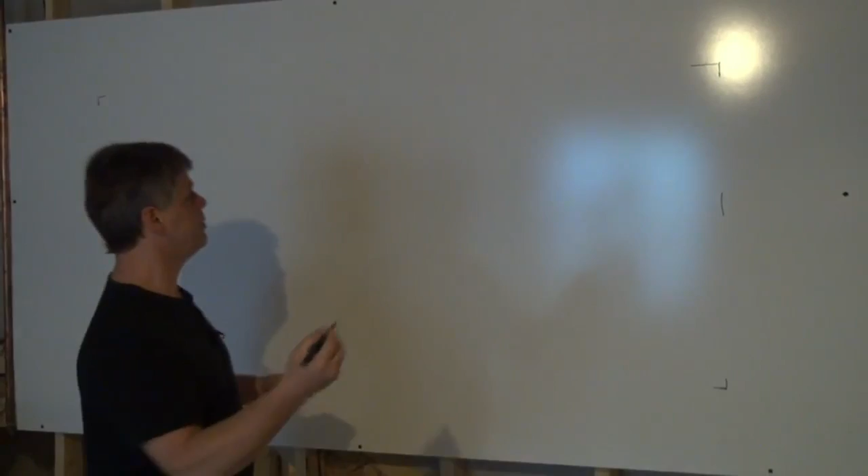This is where it all begins. And what we're going to be talking about today is the design. Without a design for your basement, you're kind of like a ship in the ocean without a rudder. This is what I find most homeowners that want to do their own basement are like. They're just nailing up walls, nailing 2x4s together in an attempt to finish off a portion of the basement. But they don't have any real clear-cut plan of attack. And the plan of attack in any construction project, be it a basement, a kitchen, a bathroom, or a backyard shed, you need a plan.

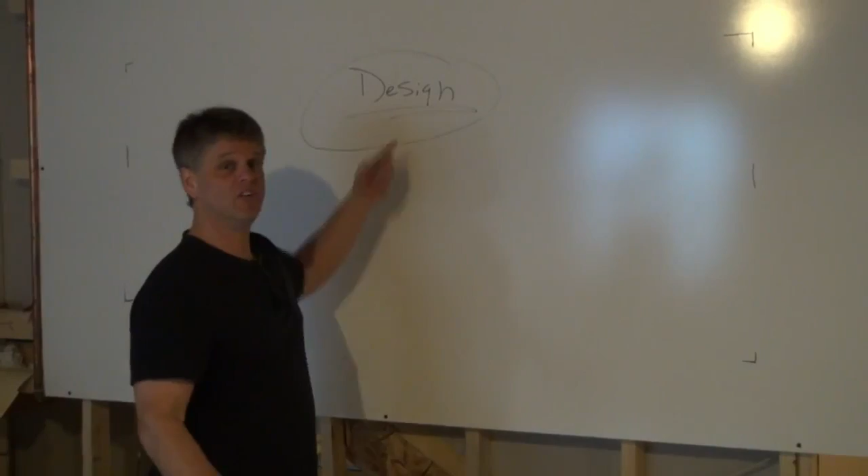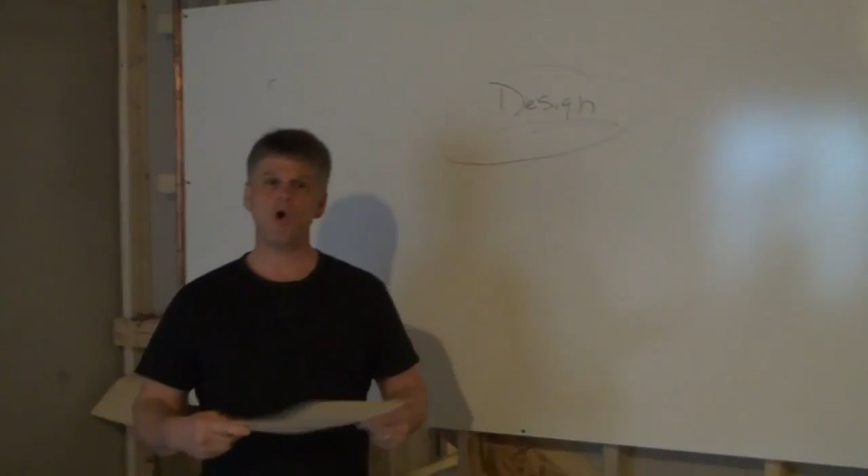You need a floor plan, and you can't arrive at a floor plan without a design. So what we're going to do today is I'm going to be using this big whiteboard in place of what I normally use in the field, a folder. What I'm going to do is walk you through this basement that I'm standing in here this morning, which is an actual client. My client has allowed me to film this job to make some of these videos for you. So I'm going to design this basement.

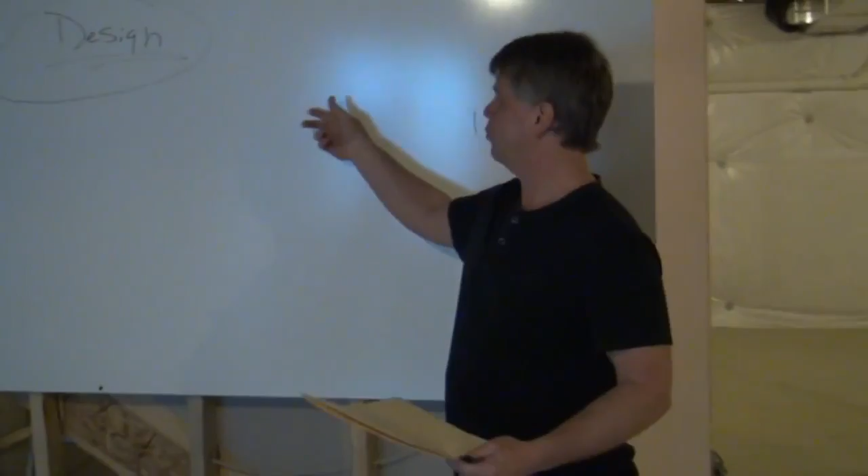Now if I was coming down for the first day, I'd have one of these folders. This is actually what I'll be designing on when I come to see a client. But for educational sake, I'm going to do it on the big whiteboard, what I normally would do on the folder, so that you can see what I'm doing.

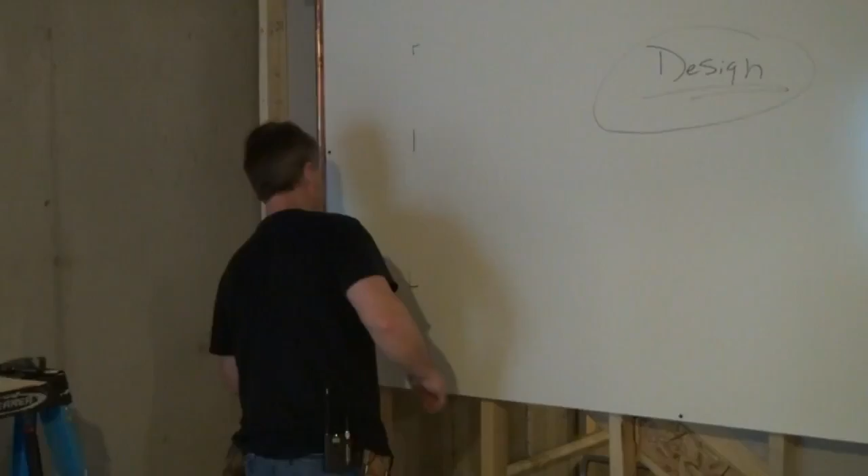The first phase of any design is we have to draw the basement. As you can see, we're standing in an empty basement. As we know from an earlier video, this basement is a perfect rectangle. We've got 4 walls down here, we're in a rectangle. There's no outcroppings in this foundation, this isn't a real fancy foundation. Your basement might have some different shapes to the foundation, it might not be a perfect square or a perfect rectangle.

But this one is, so we're going to be drawing a perfect rectangle. I'm going to do that up here on my board, because this is where it all starts. This is the very beginning of your basement project. It starts on paper. So we're going to draw ourselves a rectangle, and I'm just doing this freehand here, so don't expect perfection. I'm no artist. There's the rectangle, this is the basement that we're in right now.

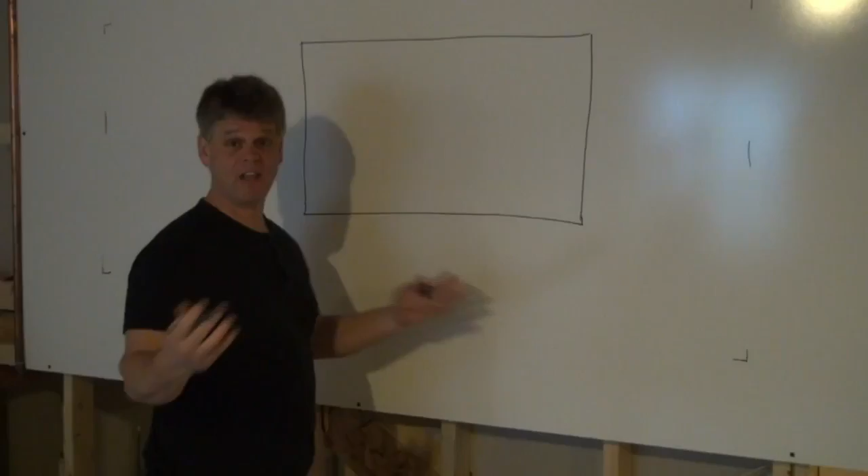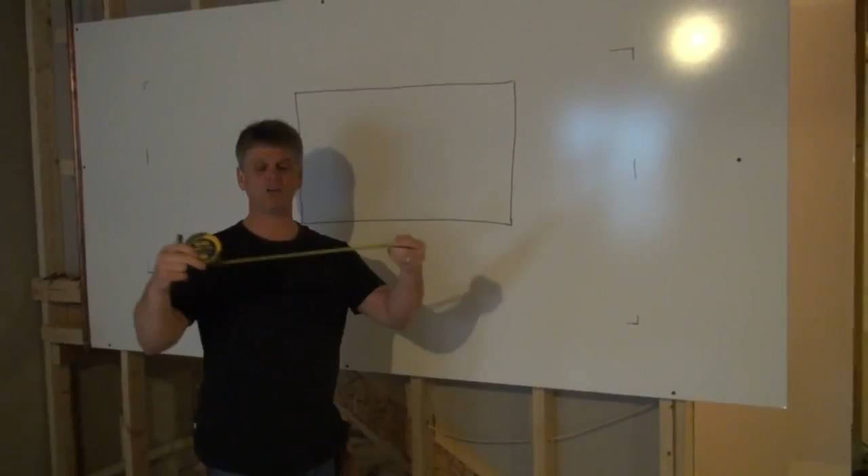Now, what I'm going to do first, before I put anything in the picture here - stairs and furnaces and all that other stuff that's down here, which will eventually be in here - the very first thing we're going to do is go around with our tape measure. I've got a Stanley 30-foot tape here. I recommend you get a contractor grade tape measure, you're going to be using this throughout your basement project anyhow. So get yourself a good tape. This is a 30, but don't get anything less than a 25.

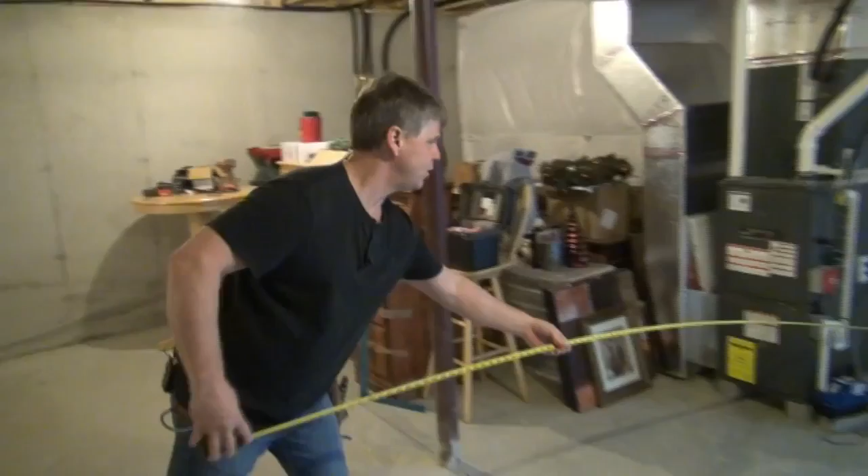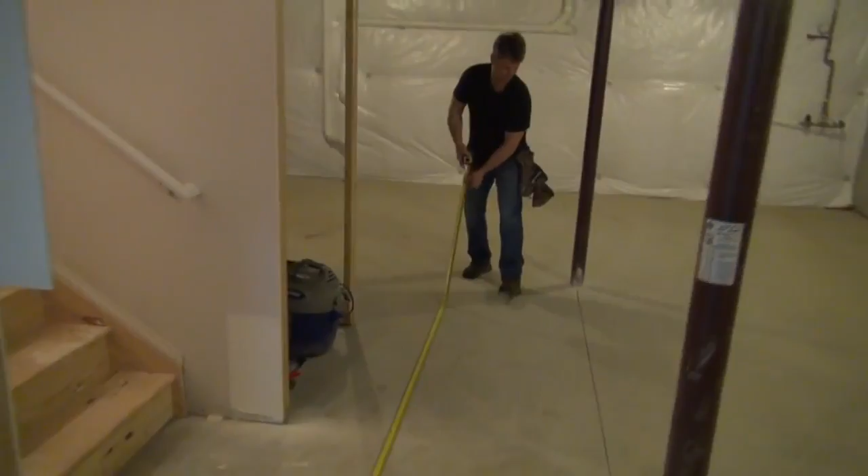What I'm going to do is real quick, run around and measure the 4 walls that we just drew on the big whiteboard there. So I'm going to get the width of the basement first, and you can find the width anywhere - it doesn't have to be along the wall, just as long as you're going across the full width of the basement. So I'm going to go right down the middle of the basement here. And I know this basement is longer than 30 foot, so what I'm going to do is just pull my tape out to the 30-foot mark, and here's where it ends.

I'm going to put a marker down here. You can use a pencil or whatever, just to lay it on the floor so that you know where your 30-foot mark is, or if you have a 25-foot tape, where your 25-foot mark is. So I know that that's 30 feet there.

And I'll go from that mark the rest of the way to get the rest of the measurement. And there I got another 9 feet. So 30 plus 9 is 39 feet.

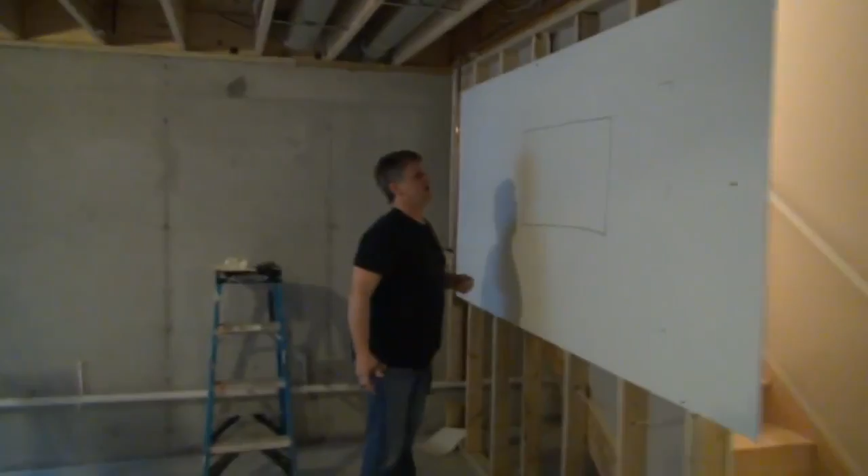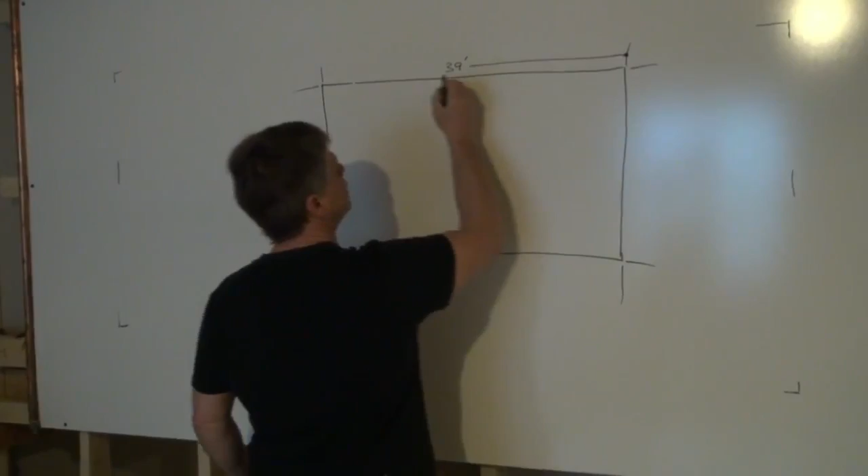Let's put that on our drawing. Now, to make it easy so I don't crowd the inside of my basement where I'm going to be putting all my stuff, I'm going to put these measurements on the outside. You can see I'm making these hash marks around the outside off of each corner. I'm going to put that 39 foot right here, and then put a line going over. You can make little arrows or circles, it doesn't matter, but this is the way you begin your floor plan, because that's what this is going to turn into.

This is going to turn into the working drawing, the working floor plan for this basement that I'm doing for my client. So if one side's 39, the other side's going to be 39 because it's a perfect rectangle. Now we got to get these two sides of the rectangle.

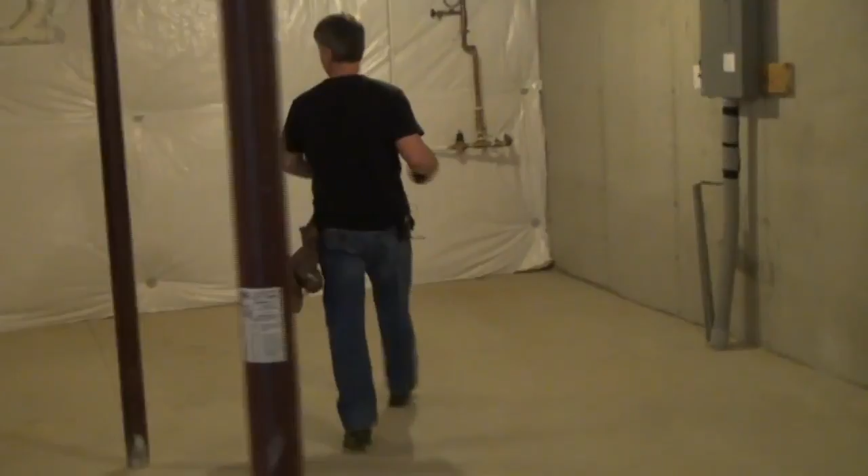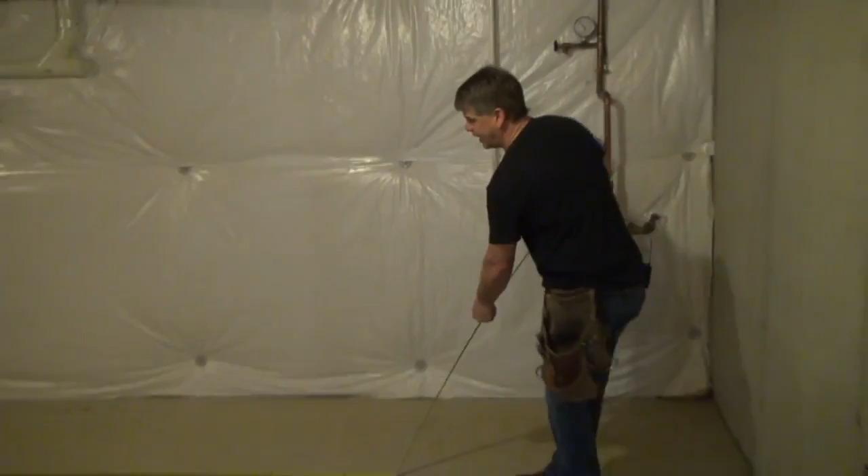So I'm going to go back over here to this end of the basement. I can measure either end. I'm going to come down here because it's a little easier to film, and I'm just going to measure right across here. You can see I'm doing this all by myself, I don't need a helper here. I'm just laying my tape on the floor. And I got 23 feet.

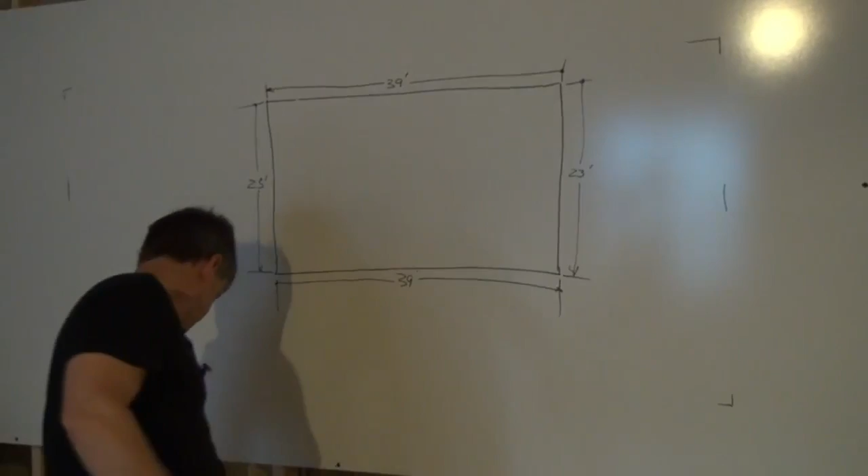We'll put those on the sides, 23 feet. And we'll make those arrows here, whatever you want to do. You can make a little circle up here at the end, or come down and put an arrowhead on there. 23 feet. Okay, there's the dimensions of our basement. We know it's a 39 by 23 basement.

Now the next thing that I'm going to put in here is going to be my stairs, because the stairs are kind of the biggest obstacle that you have to work around. If you come over here and look back this way, you can see that I'm standing in front of the staircase. We've got the upper steps coming down, you can see them up there coming down, and then you can see a landing up here and then another set.

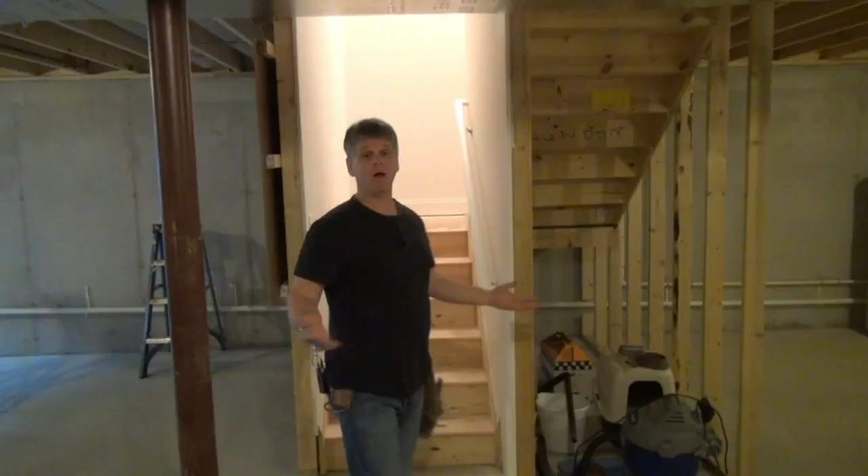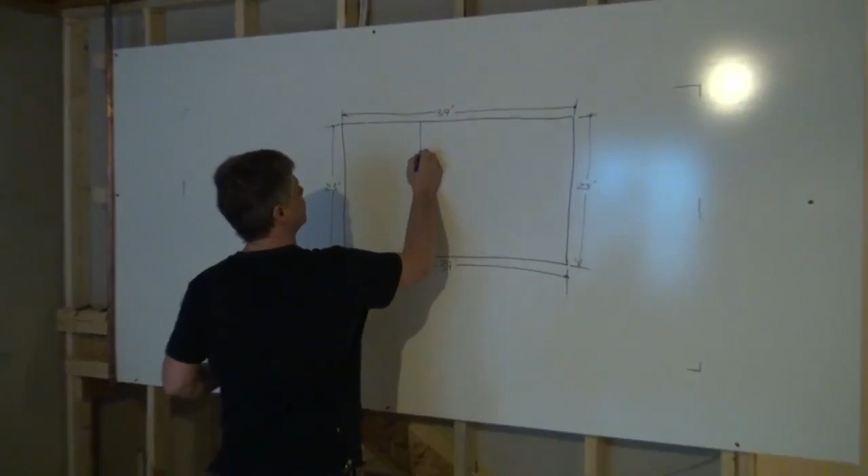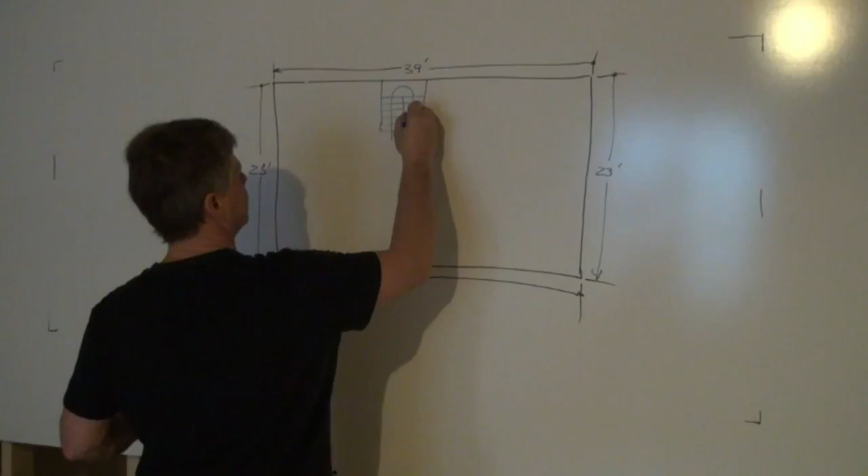So this set of steps comes down to a landing, turns, and comes down. I've got to get this drawn on my plan so I know what I have to work around. So we're going to draw that set of steps, and they're going to look like this. Got a landing over here, and then we've got a set of steps coming down to the landing and then turning and coming back down like this. So I'm going to draw an arrow going around and up. We go up the stairs to the landing, around, and then up to the first floor of the house. So there's my steps.

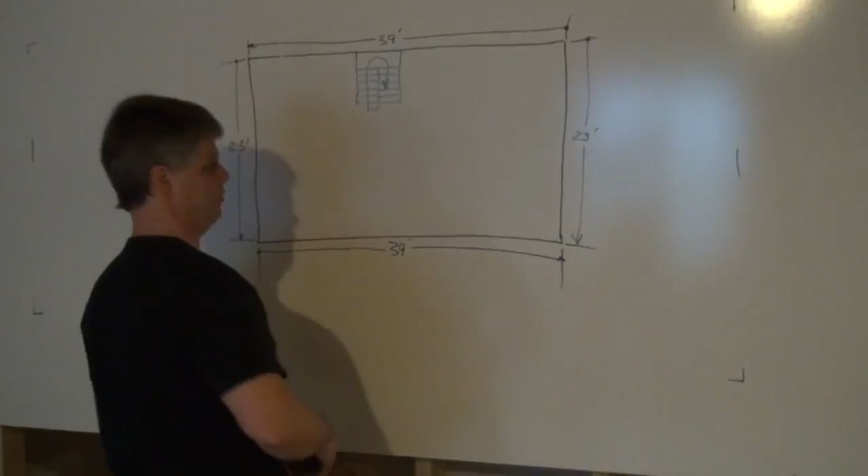Now what I want to do is get the measurements of these steps. How big is my staircase? I need a width and a length of these stairs. So I'm going to measure that right here because I'm standing in front of the stairway wall. I've got 8 foot that way, and I've got 7 foot this way.

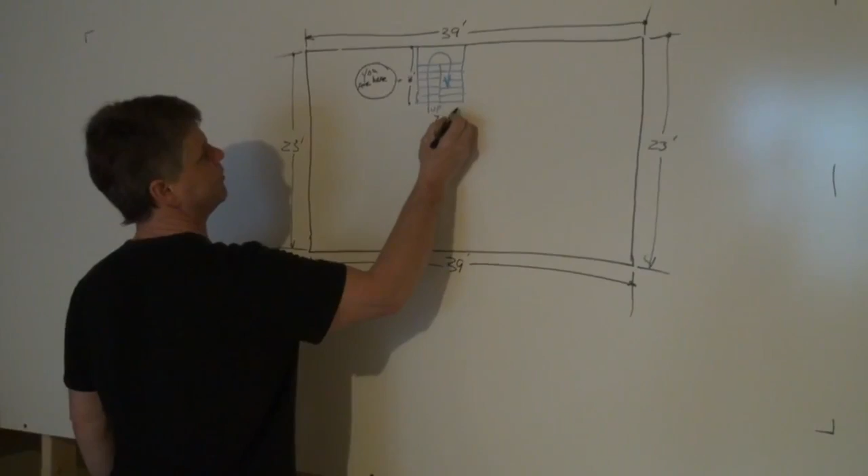I'm going to go ahead and put that on there. All right, we're standing right here. We'll put one of those things you see at the airport, you are here. We're looking this way. So we just measured that there, the length of it is 8 foot, so we're going to put an 8 there. And coming this way, it was 7 foot. Got little lines there, 7 foot this way. There's our steps.

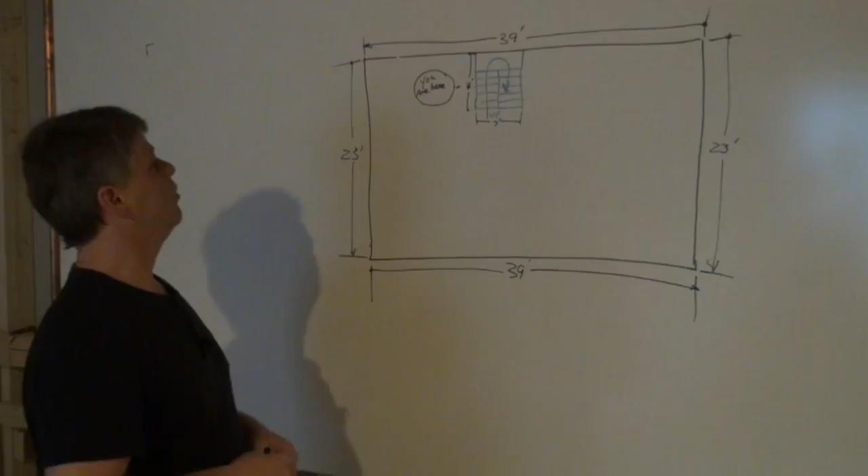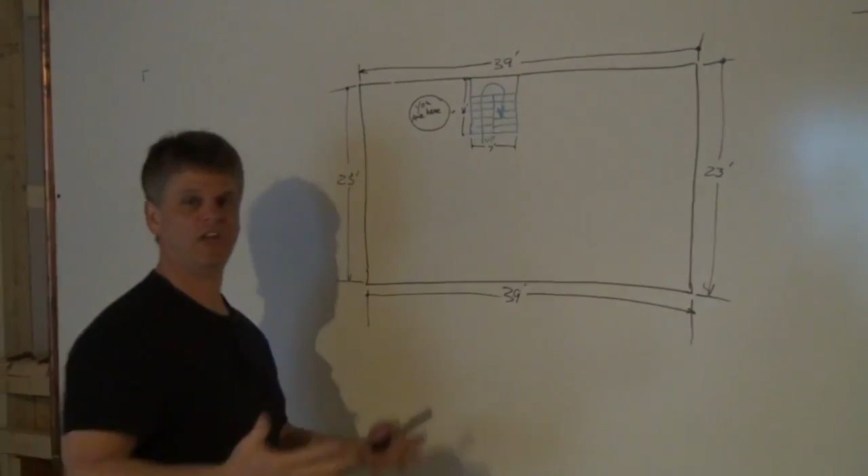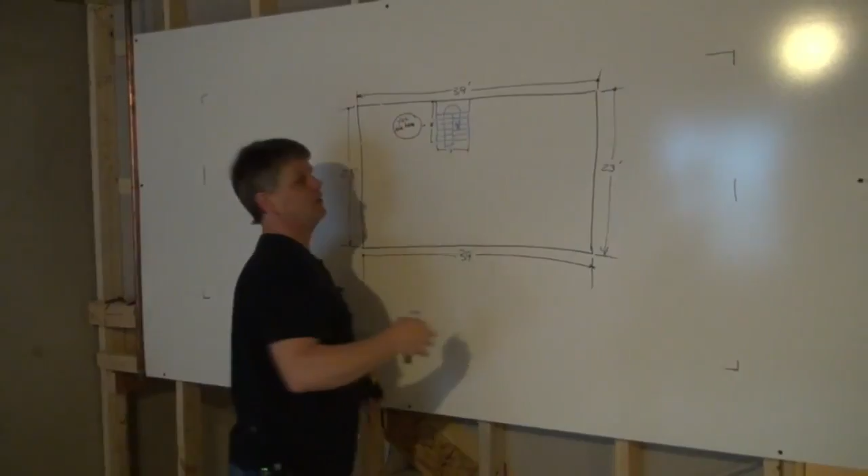Now, just having the size of the steps in relation to the basement is not enough. We have to get the location of those stairs in relation to all the other walls. Where is it actually sitting in the basement? So we'll get some measurements to find out. I get that by pulling my tape off of the walls in the basement, and it's really up to me how I want to do it. I can pull off this front wall back to the stairs, or off either of these side walls back over to the side of the steps to get 2 measurements. You need 2 points. So we're going to get this one first here, right where we're standing, off that outside wall, over to my steps. I've got 17 feet 6 inches.

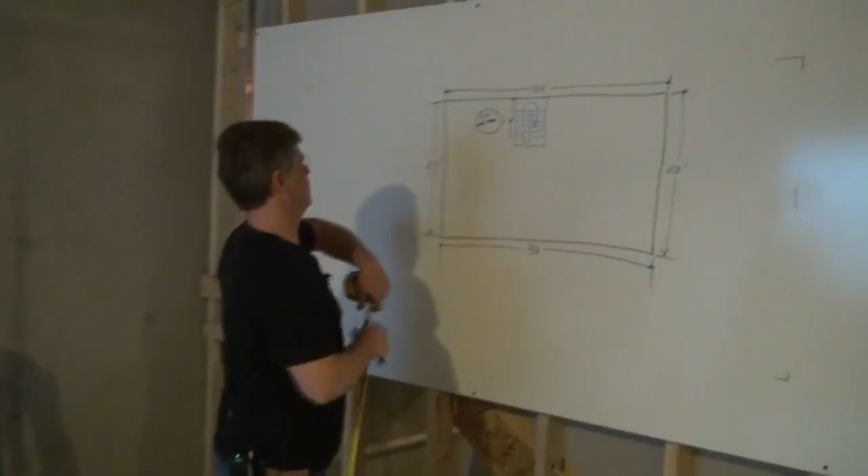All right, so we're going to put that in there. 17 foot 6 inches. And we'll do our little measuring lines there.

All right, why don't we go from the side wall over there back to the front of the steps and get the other measurement. Come off that wall there and right back over to the bottom of our steps, and that's 15 feet. All right, we'll put that on there. 15 feet.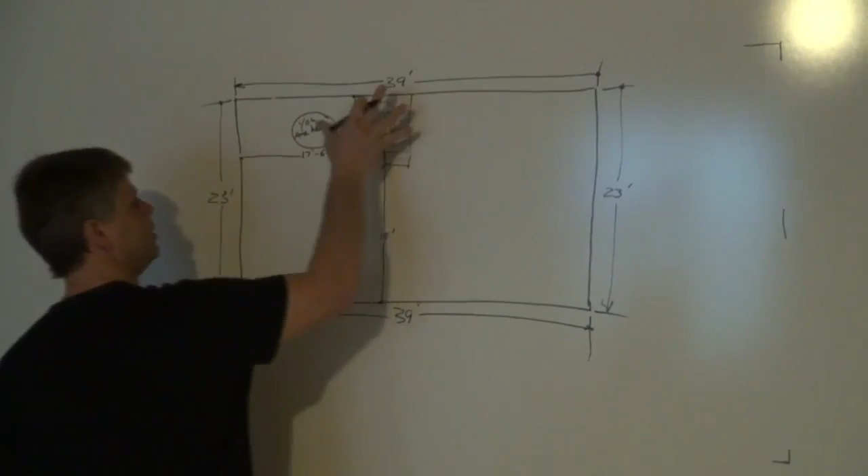All right, now we know the size of our steps and exactly where they're located. Okay, now we're ready for some more obstacles.

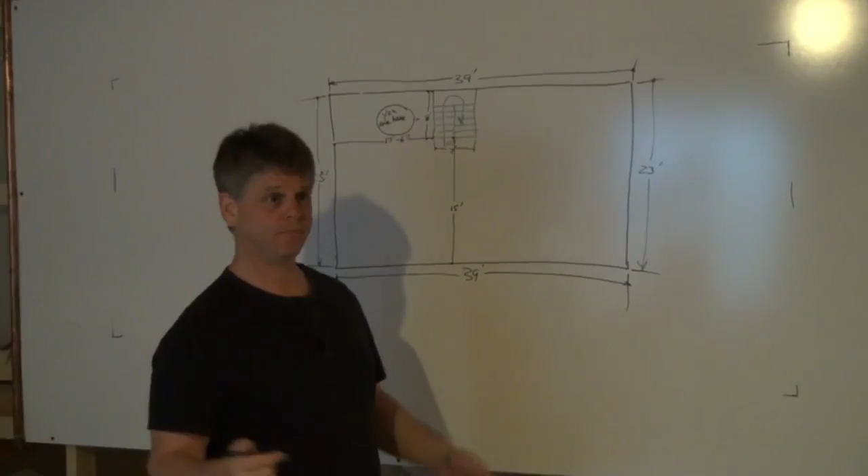The next ones that I put in are the support columns. Okay, and you can see we got here 3 of them. 1, 2, and 3.

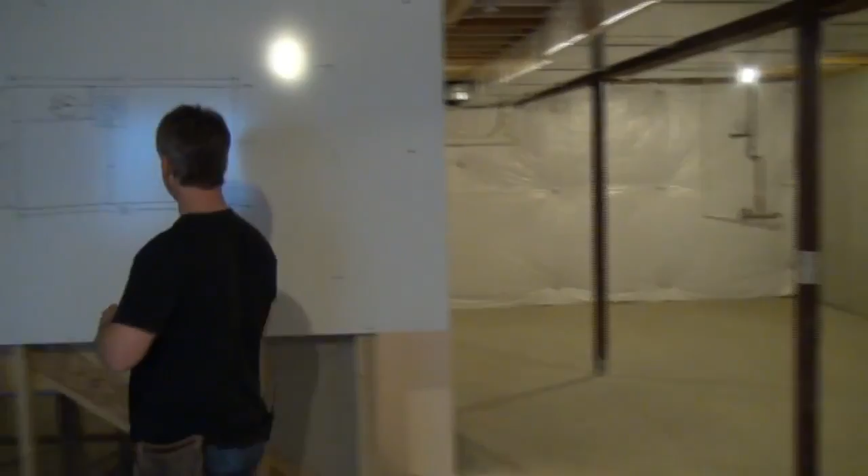Okay, what we have to do is find the centers of all 3 of these columns, because these are definitely going to play out in our design. Whether we're building walls around these, half walls between them, whatever it is that we're going to do, we're going to have to design around these. These are going to influence our design, so we have to know exactly where they are. Not kind of sort of where they are, we need to know exactly where they are.

So I'm going to go ahead and draw them in here. I know I have one here, I've got one here, and I've got one more about halfway out in this bigger area over here. All right, so I'm just drawing 3 circles. And then I'm going to put some crosshairs on those, right down through them.

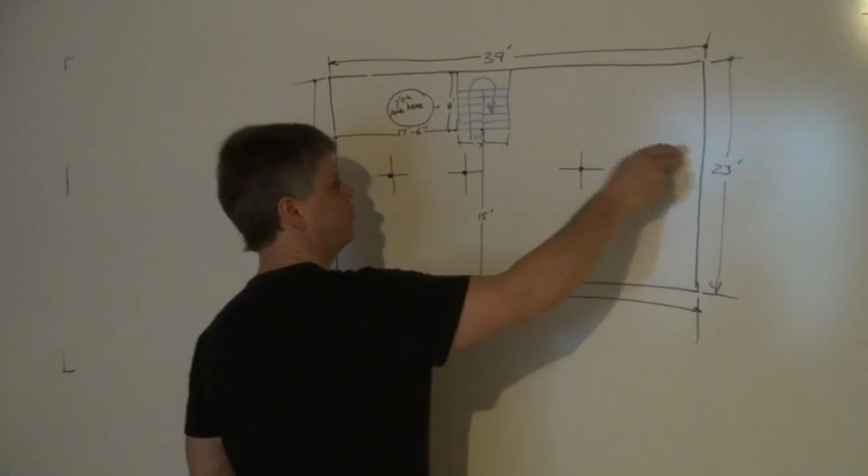All right, and what we're going to do now is find out where these poles, these support columns, are in relation to our exterior walls. And we need 2 points again, I need an over and a back. So I'm going to come off the end wall down here and find the overs for all of them, and then the back on them.

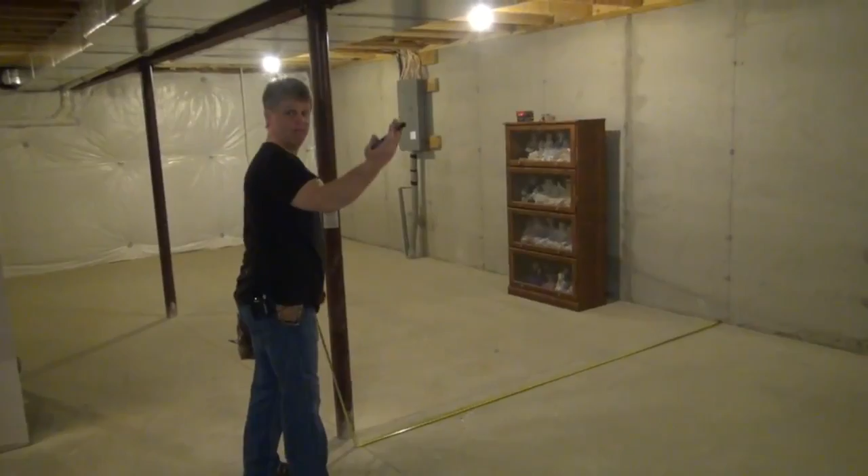Okay, so let's do that first. Let's do the back over to them here. Off that back wall over to my center column, and I can take any 3 of these because they're all going to have the same over, since they're all in line with the beam above. All 3 of these columns are holding up the same beam up here.

So if I get one over measurement, I got all 3 of them. It looks like 9 foot 9 inches. So I'm going to put that on our drawing here. This is the one we just measured, 9 foot 9 inches. And I know that the other ones are going to be 9 foot 9 inches as well, because they're all in perfect line.

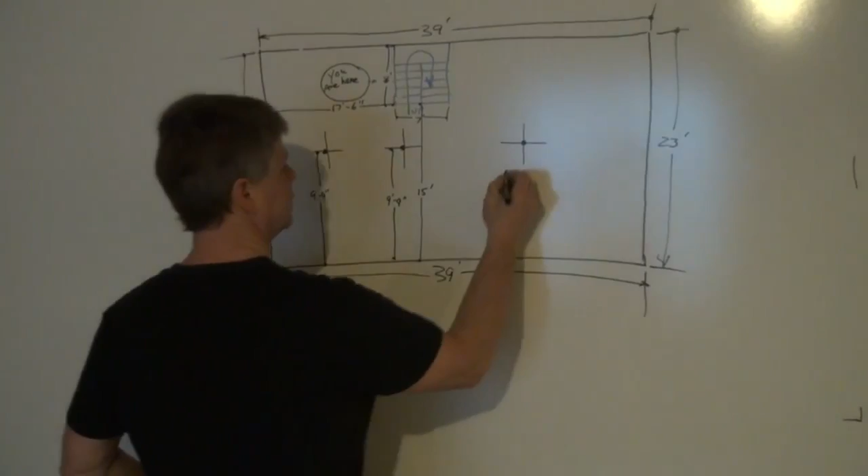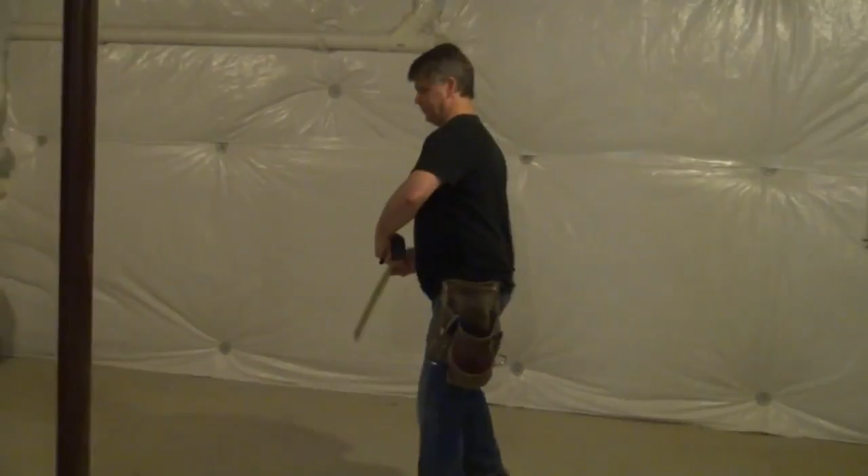All right, there's our overs. Now we're going to find out what they are coming off this wall this way, back down through all 3 of them, off this wall down here. What do we got between the wall and the first column? We've got 10 foot 8.

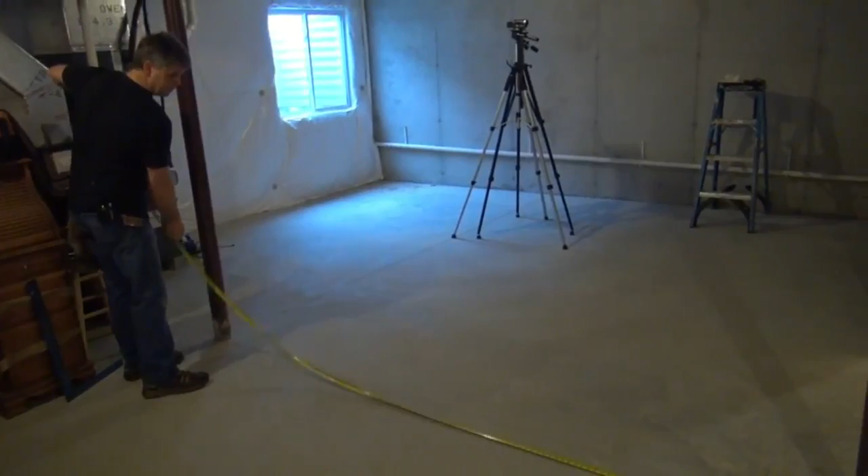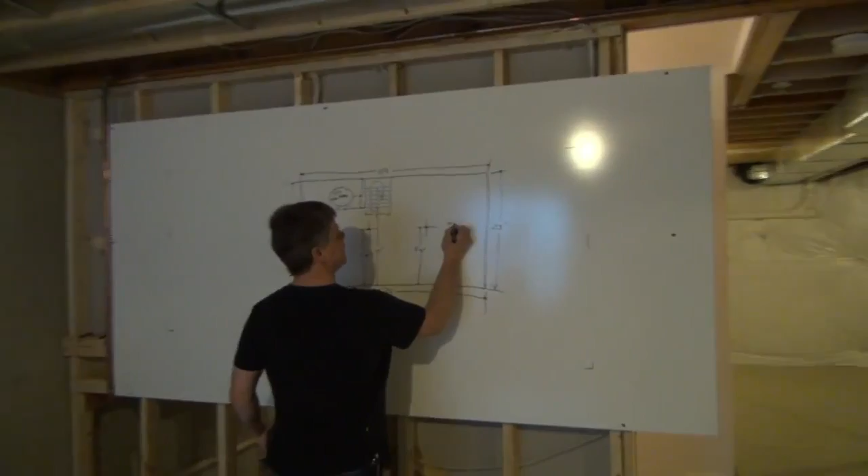Now I'm going to go from column to column. I've got 10 foot. And this last one, 10 foot 8. All right, let's put those measurements over here on our drawing. We got 10 foot 4, 10 foot, and 10 foot 8.

Okay, all right, so that's from here to here. This one's from there to there. And from here to here.

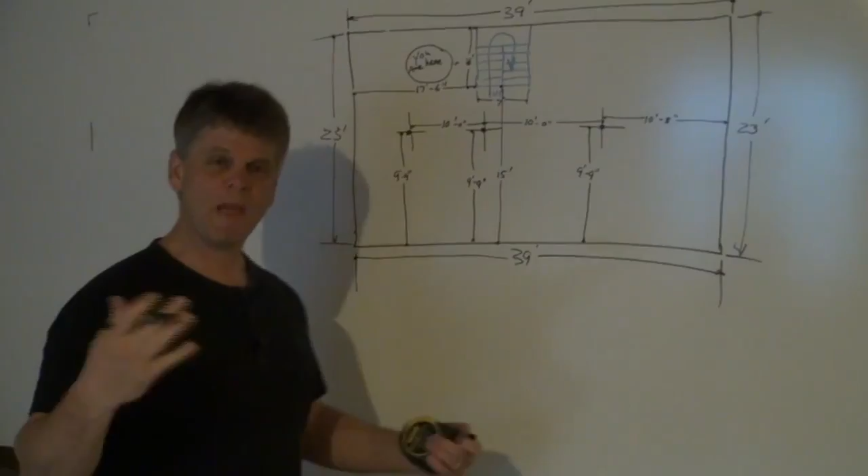All right, now this may look confusing, but it's really not. This is really simple, but it has to be done, okay? Unless you want to pay somebody to come in and design your basement, which can cost anywhere from $500 to $2,500, depending upon who you would call.

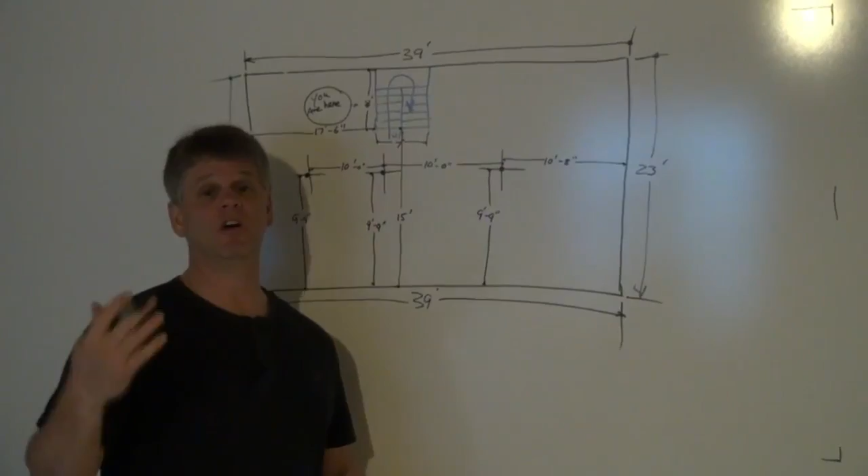If you call a registered contractor that specializes in basements to come in and just design your basement, they're going to hit you with prices like that. If you call an architect or designer, they're going to charge you that as well. So I'm trying to save you some money right out of the gate and get you a little more intimate with your project. Because if you understand what you're doing here, the rest of the project will already be burned into your brain, since this is forcing you to design your basement exactly like it has to be.

Okay, all right, now we got all that in there. That's our main dimensions. We got our support columns and our exterior walls.

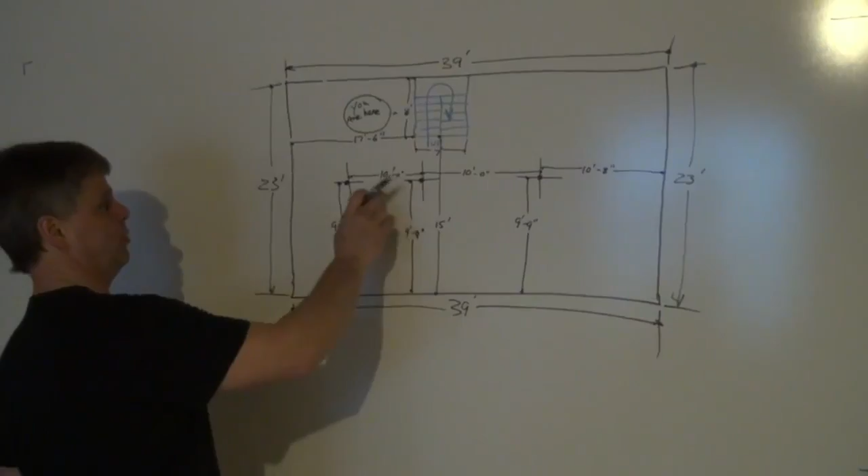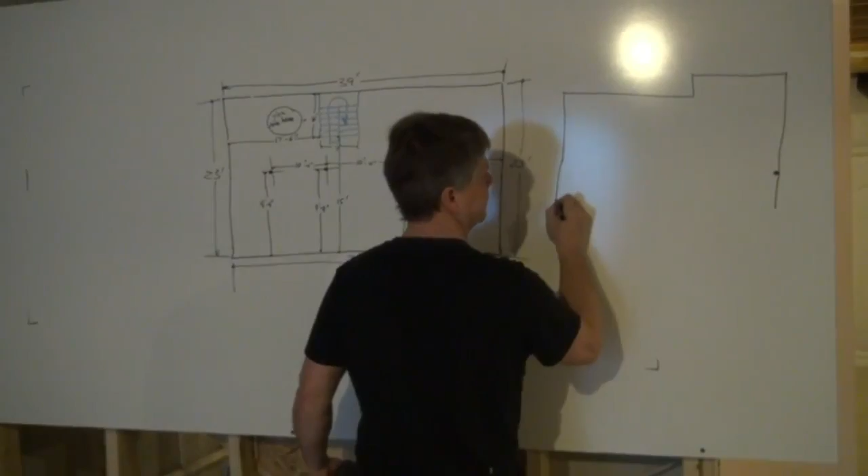Now your basement might not look like this. Your basement may be like this, and then it may jut out like this, the foundation, and come over, and it may look like this. Okay, no big deal, you're just going to do the same thing. You're going to get your dimensions off of all of your different sides, whatever shape your basement is. Say this is 20, all right, and this is 10.

And this little piece right here is about 6 foot. You got to get them all. This side over here is 30. Okay, 30, and that's 6. So this side over here would be 36.

Your steps might not come down and turn like this. No big deal. They might come straight down, just one long set of steps straight down in. Draw them in. Simple. Get the length of your steps, say they're 12 feet long, put that in there. They're 3 feet wide, put that in. Maybe 10 foot off of this wall to your steps, and 11 foot from this wall back here to the back of your steps.

Now you know where your steps are located in relation to the basement, and you know the size of them. Your support columns might be here and here, and there might be 2 out here. No big deal. Put your crosshairs on, get your overs, and put your numbers in there.

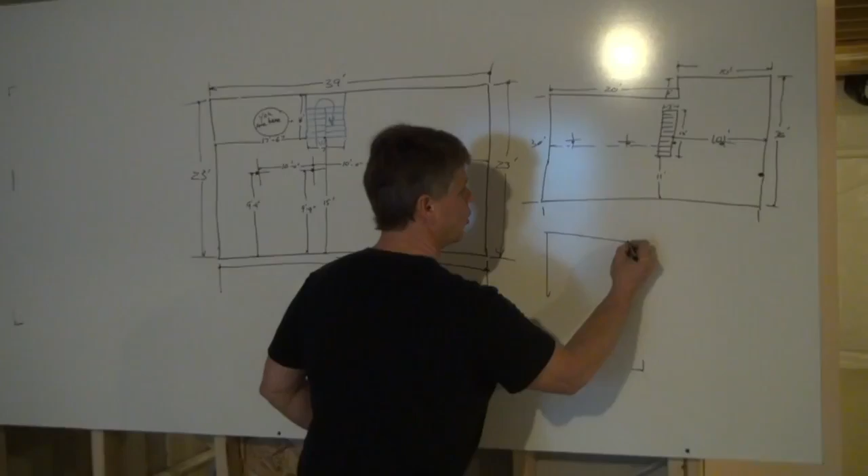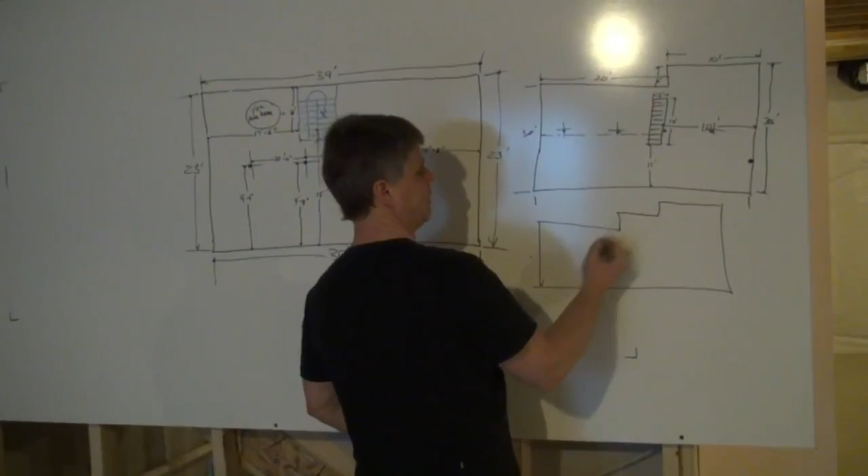Whatever shape your basement is, you're going to do the exact same thing I'm doing here. You're just going to apply it to your set of obstacles in your particular basement. So don't be alarmed if you got a basement like that - it may come over and go out once, then go out again. Whatever it is, it doesn't matter. You're just going to get the dimensions of all of the outside walls first, then put your support columns in, and put your stairs in. And you're going to be right where we are right here, right now.

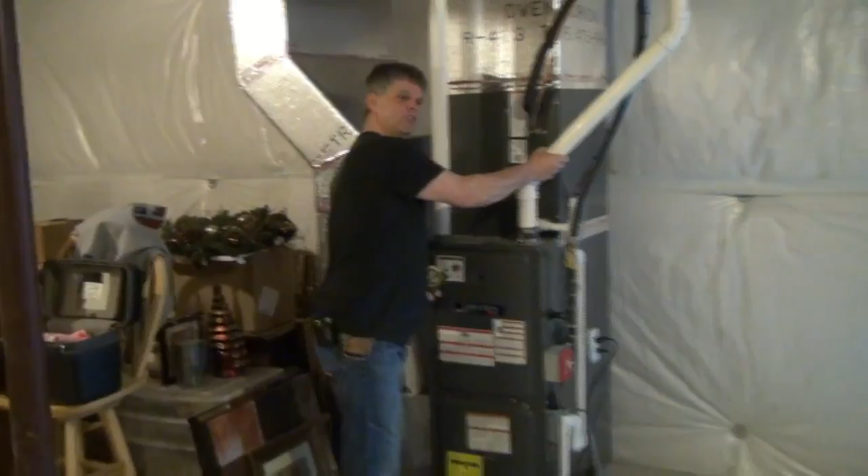Now the next thing we have to do is start putting in our mechanicals. So we've got a furnace over here. We got to know where this bad boy is, because he's a major design factor. We got to hide him away, and it's got to be done professionally, like it was done for a reason.

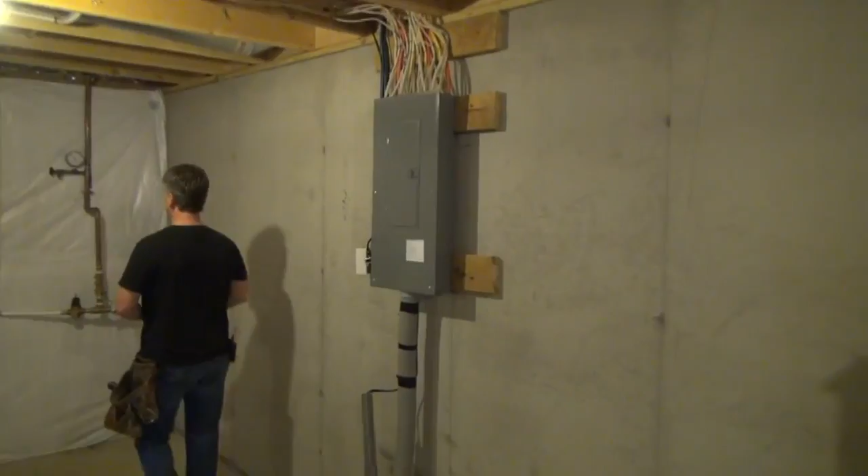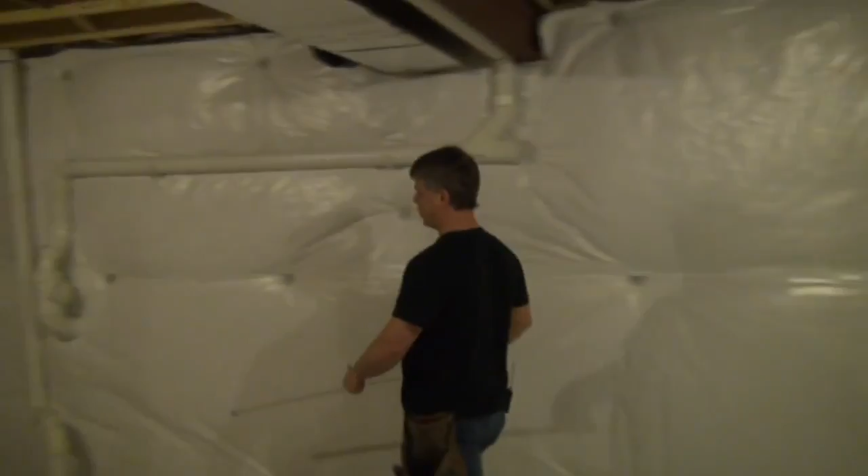So we got a furnace. Down here we've got the electric panel box - got to hide him. We have our water meter, our main valve coming in from the street, bringing water into the house - we've got to hide this guy too. Over here we've got a radon pipe sticking up out of the floor. We've got a sump pump in the corner - can't move that, we're going to have to work that into the design. We have our water heater.

Now water heaters, you can see, are pretty flexible here. These lines can be cut, and water heaters can be moved to different locations. But we're going to try to work it into the plan so we don't have to move it, to keep the cost down. So we have him as well. Let's go over to our drawing and put those things in.

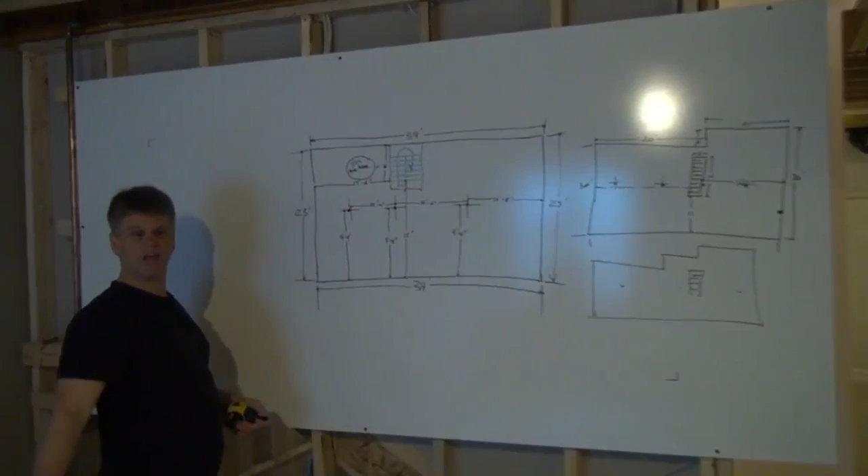All right, we've got our furnace down here, sitting right about here. I normally just draw a square where it's sitting and put an X through it. You can put HVAC on there - that just means heating and cooling. We know that over here in this corner we had a sump pump pit with the pump in it. We'll just put 'sump'.

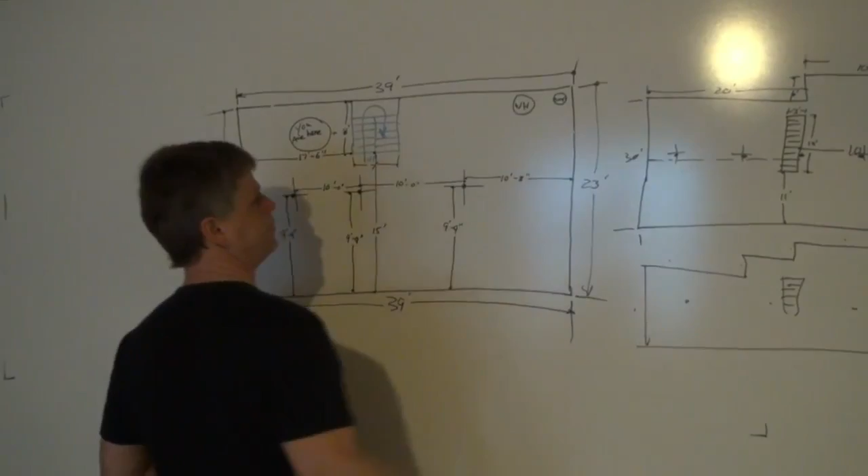Over about here we had our water heater, WH. Over here we had about 36 inches worth of pipes and stuff for our water meter. What I normally do for this stuff, instead of writing inside here, I'll put an arrow outside my drawing and write 'water meter'. WH means water heater, so we know what that is. We wrote 'sump' in there. Our furnace over here - you can also just put 'furnace' there.

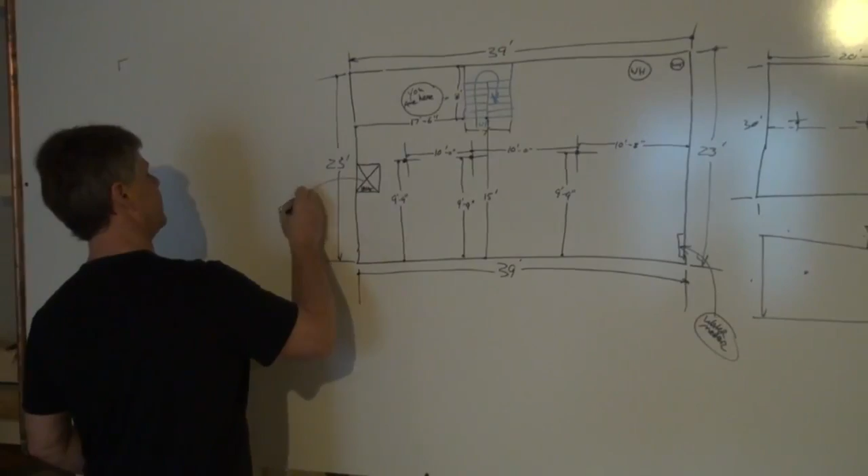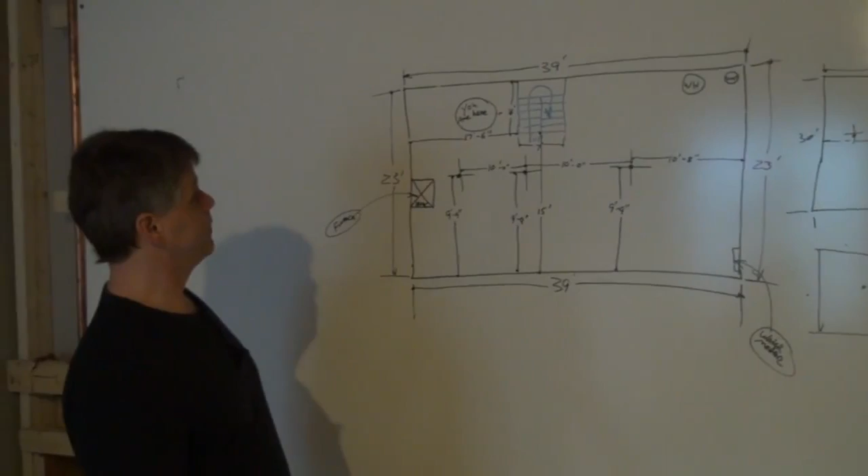Now, while we're on the subject of this floor plan - if you're pulling permits, the people approving your basement plan are going to want to see all this stuff anyway, so you might as well get it all marked and laid out, because they're going to look at your drawing and figure this guy knows what he's doing. So I think that was the main obstacles. We did have a gas manifold right here too, so we can put that on there - we'll just put 'gas'.

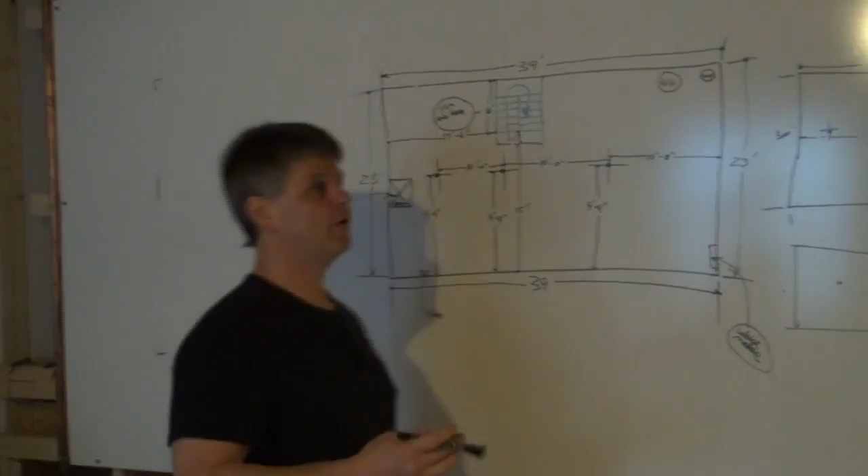Now let me look around here one more time, because I am new with this job, not too familiar with it - make sure I got all my obstacles. Okay, I missed the radon pipe, we'll go put that back on there. I also like to mark the sewage lateral, the main place where the sewage goes through the wall. Now your sewage may go down into the floor instead, and you'll want to mark that as well. But I've got it going through the wall, and I want to know where that is, because we have a bathroom going in this job, and we're going to want to tie into that.

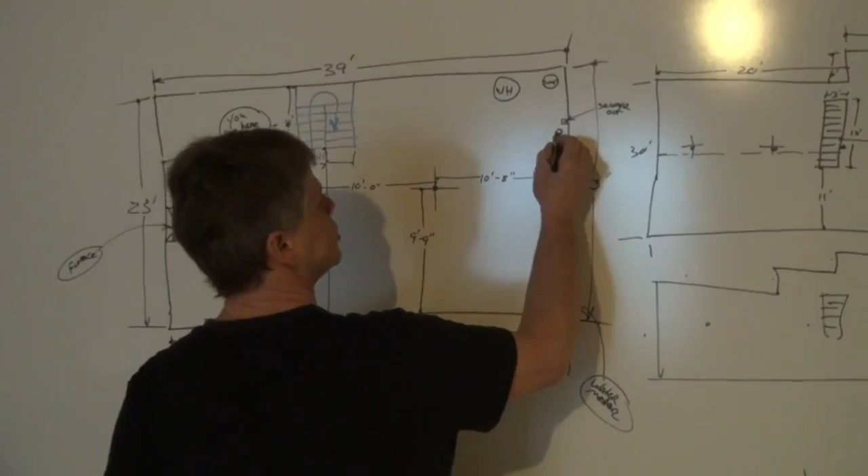All right, back over to our drawing. About halfway across, we've got a pipe sticking out here, which I'm going to mark as sewage out to the street. And then we had another little pipe here, which was radon.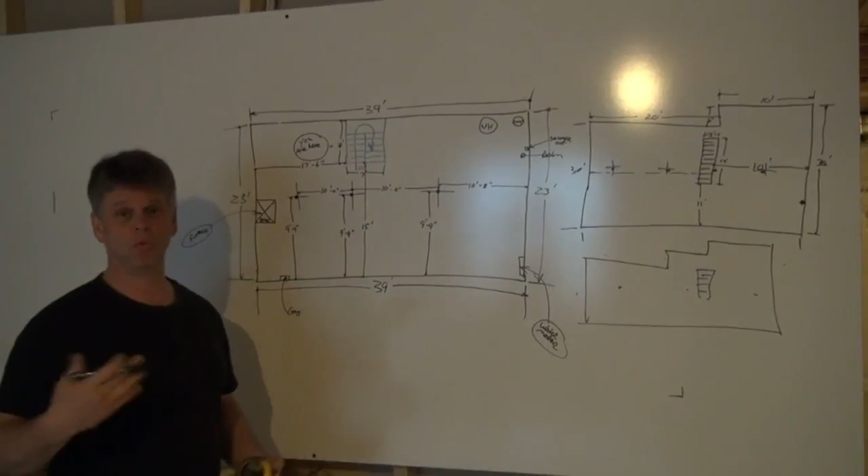I think we've got all the obstacles. Now all we've really done is we've drawn what's here now. This has nothing to do with the design we're going to be applying to this space, but now we know where everything is and what we have to work around. We know the locations of all the things in our road that we have to work into our design. Now I'm going to take a break here and turn the camera off.

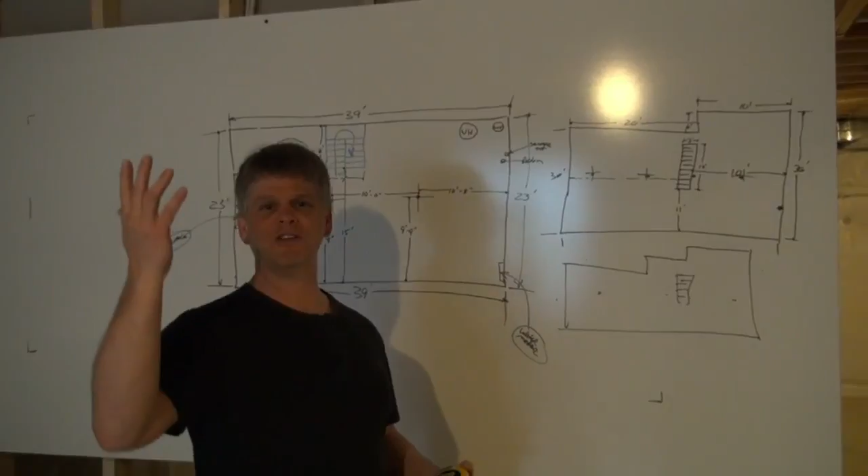Remember, I got my nephew Jonathan. Say hi, Jonathan. Hi, what's up? He's behind the camera, running it for me today. We're going to get set up here.

We're going to come back to our board and apply the design we talked about earlier in the other video to this floor plan. I'm actually standing in what's going to be a home theater here. As you recall, once we got past these columns, I was in a home gym exercise area.

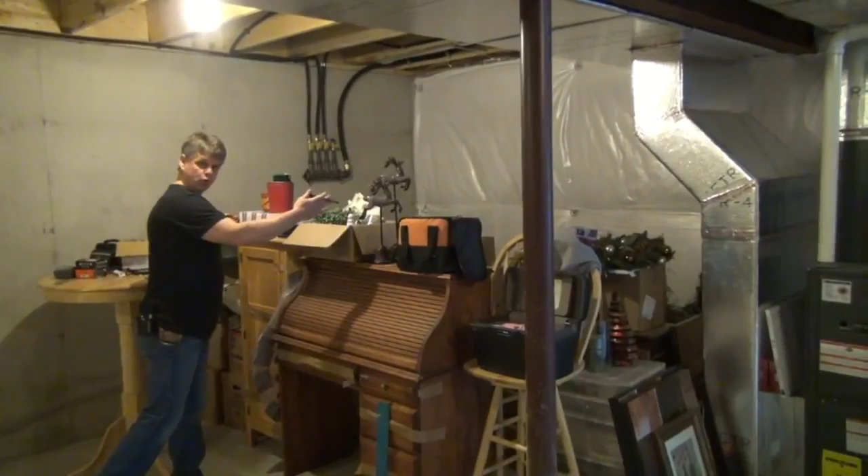This space back over here, where all the stuff is, is going to be an unfinished storage room. We've got a closet going in under the stairs for nice closet space under the steps. This corner over here we determined we'd like to turn into the home office. And then over here, tucked back around the corner in a private little area, we're going to have a full bathroom right here.

Now all the mechanical stuff over here, the water heater, the sump pit, the radon pipe coming up out of here, and the sewage lateral going out to the street, we determined we could put all that in what we call an unfinished utility storage area, right back in here.

So give me a couple minutes to get set up here, and we're going to take the confines of these areas and create that floor plan. And that's just one version of what I could do with this basement.

The very first thing that I needed to know, and the very first thing you need to know, is what zones do you want? What is your wish list? What do you want for this new space, this new living space? What do you want to turn it into? You really need to know why you're finishing the basement first.

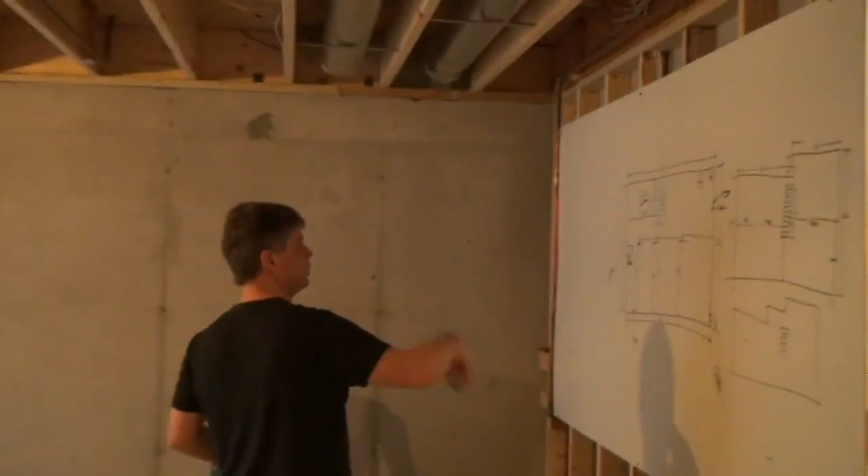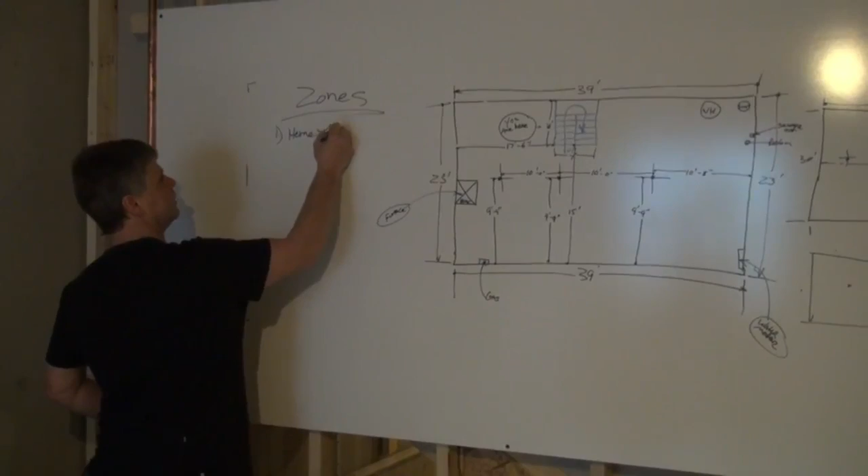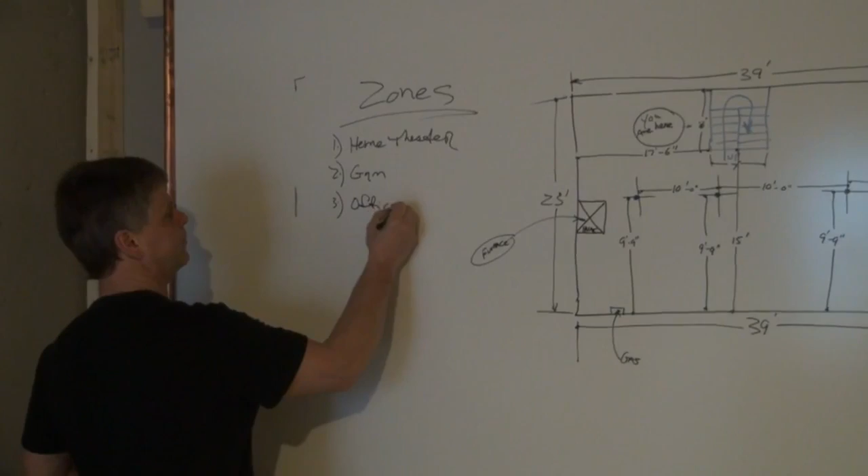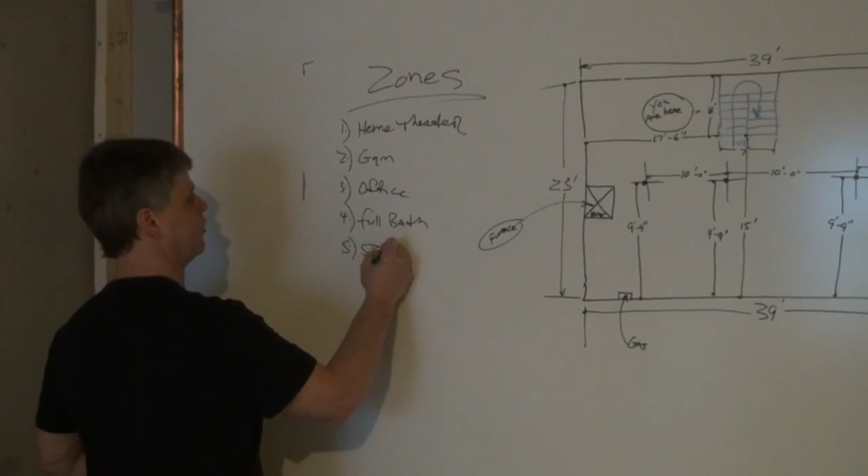So once you have your design like this, your basement drawn with all the obstacles, then you want to come up with your zones. What do you want down there? In this one here, we've got a home theater, a gym, a home office, a full bath. We needed some storage space for personal effects because the homeowners have stuff they need to store, and we needed some closet space.

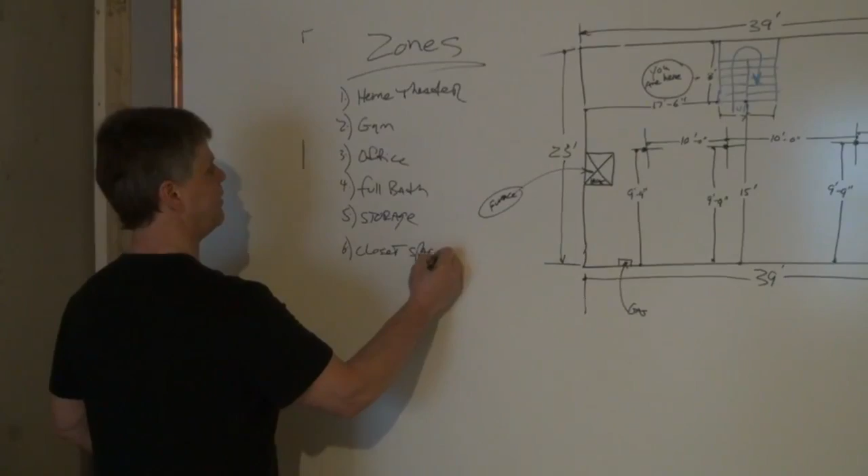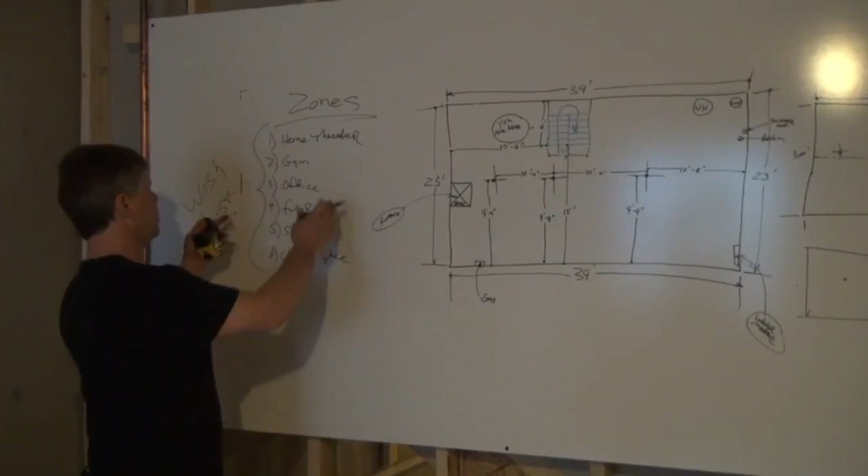Okay, these were kind of what I like to call the wish list. Start out with your wish list, no matter what it is. You may have the space for all of it in your plan, you may not. You may have the money to do it all, you may not. So that's why we call it a wish list. You start out with everything you want, and then you work from there and see what you can afford to do and what is logistically possible to design into the confines of the space you know you have now.

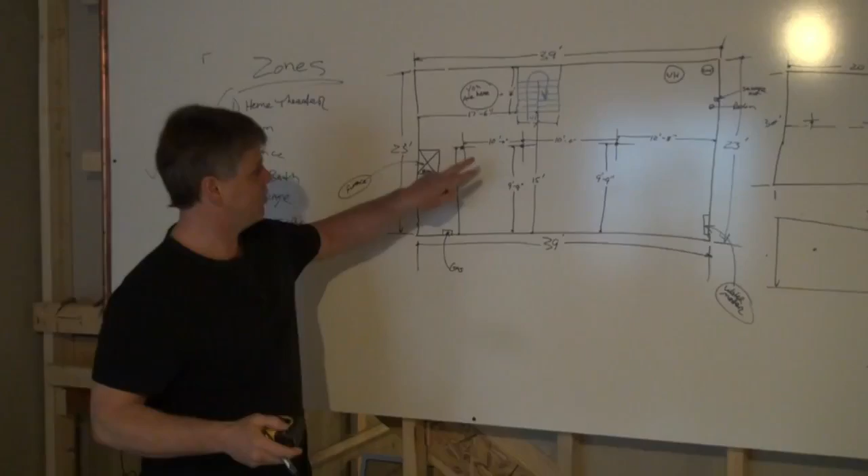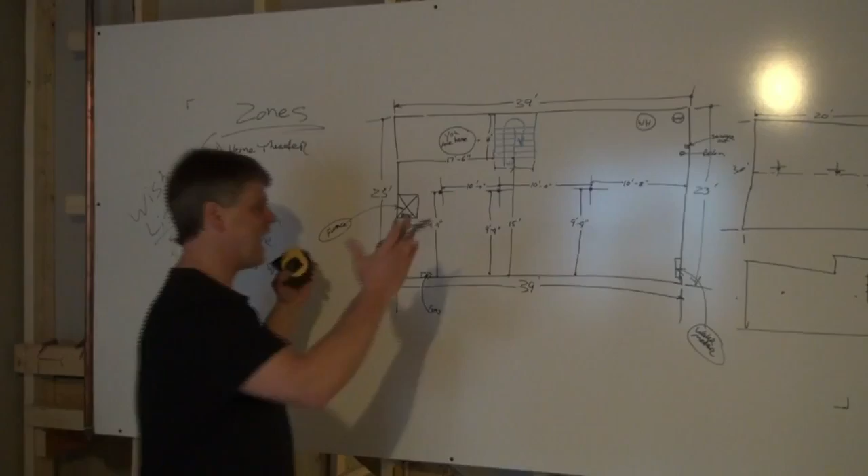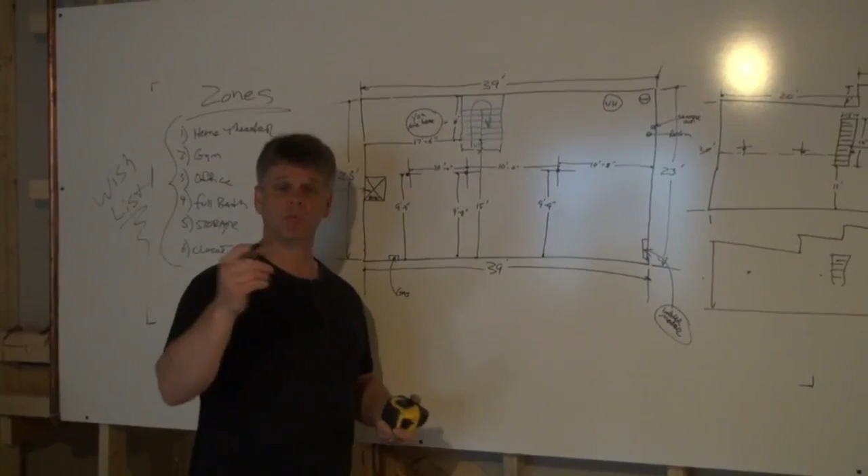So I'll be back in a couple minutes, and we're going to take this drawing right here and work these zones into it and get some dimensions on it. When we're done, what we'll have created is a working set of plans that we can take to the township and get building permits and actually begin the framing and layout stages of our project. So this is some really good, useful stuff we're giving you here today, and I want to help you get this project off and going on the right foot. I'll see you back here in just a couple minutes.